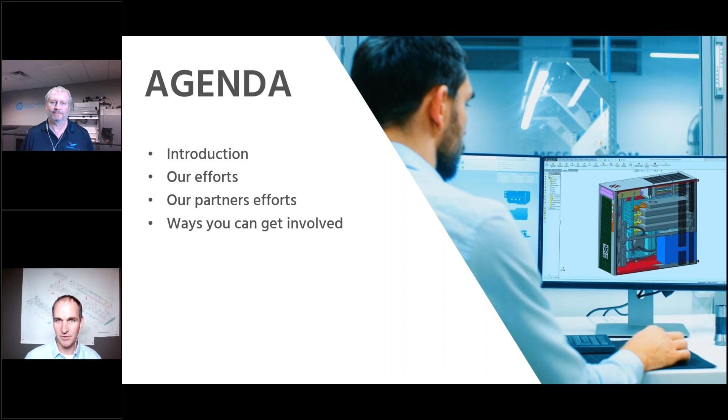A little bit about who Rob and I work for. We work for a company called Hawk Ridge Systems. We started business as a SolidWorks 3D CAD vendor. As the SolidWorks product line grew from CAD into things like simulation and file management tools with the PDM tool set, or even electrical and manufacturing tools today, it's really grown. We started taking on other complementary tools, such as the HP 3D printers or the Markforged 3D printers. We added a scanning company called Artec 3D, as well as Hexagon, which creates metrology devices like their touch probes that you see in lots of different quality groups. And then we added a few additional 3D printing tools like Materialise. It creates software that helps companies create 3D prints more efficiently, as well as post-process technologies that helps companies post-process their 3D prints faster and better than ever.

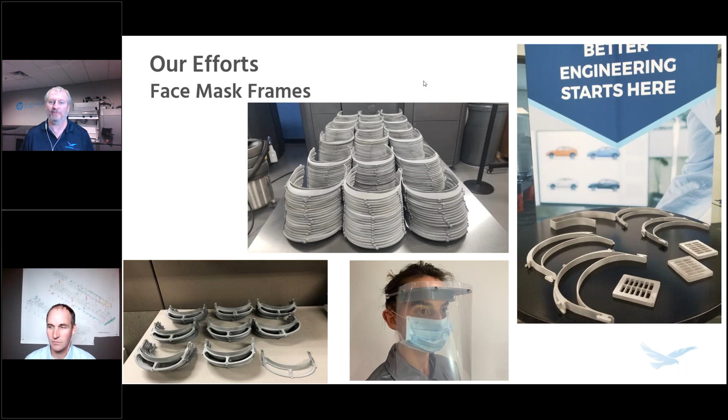So it's nice because it's regional distribution. We're not having to bring these all into a factory and pump them out. We can do this locally and get them in the hands of the people that need them very quickly. Pretty cool stuff.

Another application we've seen are these mask straps. Can you tell us what these are used for? Yeah, when you think about it, here's a very simple part, very simple application, with a lot of value to it. If you've been wearing a mask in public at the grocery store or whatever, and you hook it behind your ears, after a little while you start to get sore from that hanging on your ears. So the strap was developed to hook onto the straps of the mask. It adjusts tension, but it also takes that weight off your ears.

And we've all had times wearing sunglasses or something that doesn't take much to irritate your ears. Think of these people working on the front lines in the hospitals wearing these masks for 8-hour, 10-hour, 12-hour or longer shifts. It's a lot of wear on your ears and your body. And these we can pump out by the hundreds very quickly because it's a simple design.

You were talking to me earlier about this very design and how you were working with a customer a while back that was basically nesting them flat on the build bed, but then you showed them a way that you could actually stack them. With the HP system, it's relatively easy - it's a powdered bed system, so we can pack that entire cube, a 15 by 11 inch by 15 inch block, with all of these parts.

On the Markforged, we had a customer contact us and say, I can only get 4 of them on the print bed at a time. That's great, but I have to keep pulling parts and starting the next job - can I stack these? So we came up with the solution to stack them with a little bit of a gap, save them as a single file, and send them to the printer. It'll put support between them that you'll have to remove, but then I can put in a 5-hour build, a 15-hour build, an overnight build, and not have to be there changing them out to keep running.

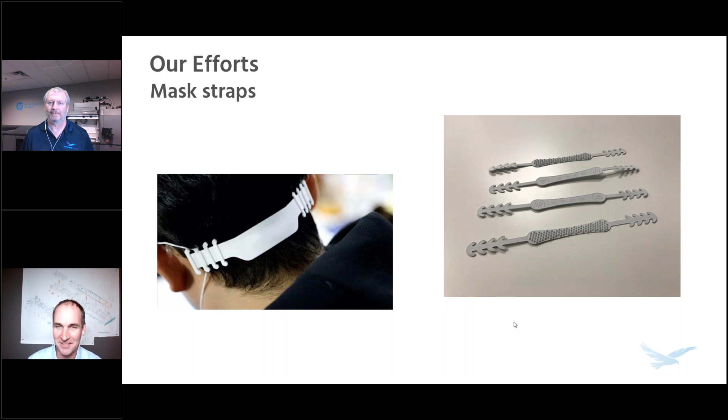And send it to the printer as one file. Pretty cool. That's the kind of stuff I think Rob's really good at, finding ways to accomplish people's needs using digital manufacturing techniques. Yeah, we've seen a lot of stuff out there.

Here's another example of efforts going on. This one's a personal effort by Scott Woods, our technical product manager out of the West Coast, based in the Seattle office. He has a friend who's a nurse who broke her mask and was told to just keep wearing it.

It's pretty tough, so he took it on himself to download some open source content and make modifications that made it print better on the technologies he's using. He's a hobbyist, but he owns like 6 of these. Maybe he's a borderline serious hobbyist - a bit obsessive, but it's good.

We see this all the time too, where local home hobbyist type stuff is able to make some strides and help people out. It's fantastic. So he printed a number of these and handed them out.

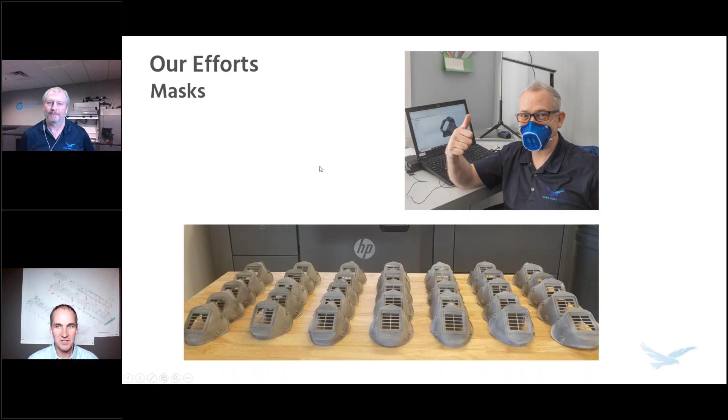Pretty neat - this is really cool, probably one of the coolest ones I've seen. This came to us through Boston Scientific here in Minneapolis. They approached us to see if we could help with this project. It's kind of cool because it's an off-the-shelf snorkel mask, something already made, and the filter on top is an off-the-shelf filter.

So what do you do? You need to hook part A to part B - you make an adapter, it's simple, just a design to make those two fit. People who saw Apollo 13, the movie - they pull out the box of parts and say, this is what we have, we need to fit this square filter onto this round hole. What are we going to do?

That's beautiful for additive manufacturing. That's exactly what they had to do here - how do we adapt an off-the-shelf snorkel mask to an off-the-shelf type filter? It's just a simple adapter, so this fits beautifully into additive. When this came to us, we did the first couple prototypes on the HP machines.

They were running their own prototypes on their additive machines in-house. We came up with a few different sizes, going back to one of the earlier discussions we've had, around how do we get this to fit. We made 5 different variations of this part and printed them all in the same build so they could check fit.

At the same time we were doing this, they built a mold. They said their mold department just knocked it out of the park, building a mold at the same time, but it needed to be validated beforehand. So we delivered 250 of these to them. I built them over a weekend. It gets them into production if they need it before that mold's put onto the line.

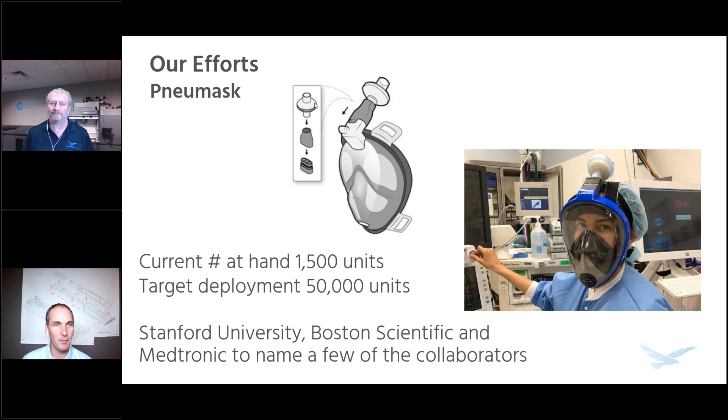We are involved in a number of other efforts, but unfortunately, due to the nature of our business, a lot of this stuff remains confidential. It's kind of a shame - some of the all-time coolest things I've gotten to do in my career I can't share with folks outside our organization, because we take confidentiality of our clients quite seriously. But know there are things we're working on that we're excited maybe in the future we can share with you.

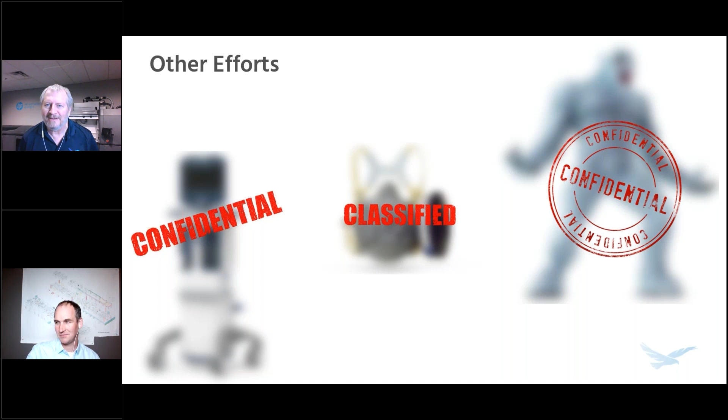Tim, is that Bigfoot on there? It sure looks like Bigfoot. Yeah, next slide. Okay, maybe we shouldn't talk about that.

Okay, got it. I wanted to pause a second and talk about why 3D printing has gotten so much exposure during this time. I know it's relatively new - well, is it new, Rob? No, it's been around for 30 years. Right, so it's catching fire. It's been catching fire for years, and sad to say, this might be one of those instances in history where this may accelerate 3D printing just because of these types of activities going on.

So while I think you and I are certainly fans of conventional manufacturing techniques, and specifically like injection molding.

I think we should be putting those in science museums and inspiring kids to go down a path of toolmaker as a career. I think it's an awesome thing. They're moving mechanical marbles that make components. If you like puzzles, mold design might be your jam.

I can design a tool that fits the end of that arm for picking parts out of a bin. I can put a part on the end of that thing that would hold it while it's being machined. It's a quick change out. The 3D printers being so quick and being able to get different iterations plays beautifully into this kind of end of arm tooling.

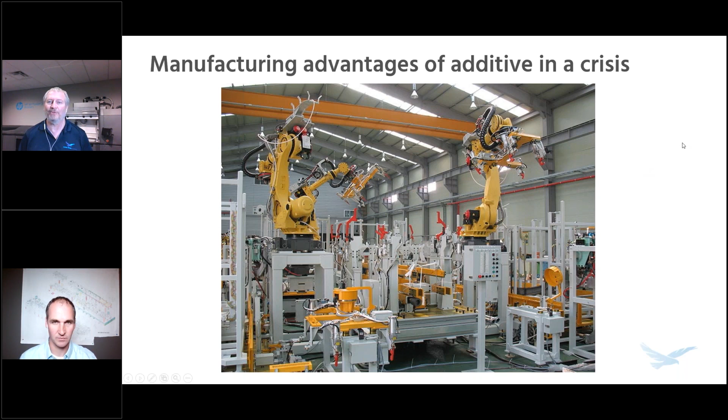And then I've also got that digital inventory, so I can send that file around the world and have them made locally and not have to have a stockpile in one place. You pretty much dovetailed right into the next point we wanted to make about the advantages of supply chain - that digital inventory, that ability to build on demand when you need it and turn it off when you don't.

And then the other part we're seeing, and we're seeing this within our own organization, is the way we can distribute this manufacturing across our different, in our case, digital manufacturing labs.

I just saw a message come through right before we started the webinar with a facility in Chicago looking for some parts. It came into our West Coast office, so they're sending that this way. Tonight I'll be building parts to send off to Chicago. It's just a beautiful piece that we don't have to be stocking these and shipping them. We can make them more local, and a lot of times right in the area they're being distributed.

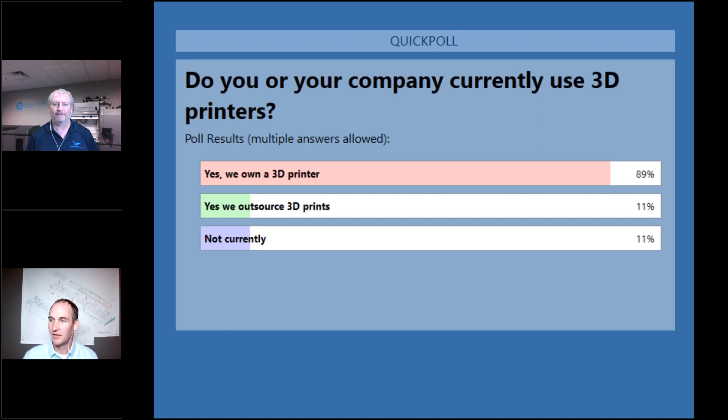I'm going to just share that with everybody in the audience here. You can see we had about 89% of you own a 3D printer, another 11% outsource some 3D print work, and only 11% aren't currently doing any 3D printing.

Beautiful. Okay, one of the things I was curious about from the audience is ways you're using 3D printing as it relates to this COVID-19 fight. If you have interesting things you're not seeing in the presentation, I'd urge you to put them in the questions area, even if it's not a question - it's not Jeopardy, you don't have to form it as a question, just pop it in there. We'd love to share that with the other folks on the line - maybe there's some interesting items you're up to.

So here's some of the items that Rob and the 3D printing team have been up to: trim guides, so this is like a cutting tool; we mentioned end of arm tooling, and we've got some pretty impressive examples of that to show you; mold tooling, whether that's vacuum forming or urethane casting or otherwise; and fixtures - boy, Rob, I've built a lot of fixtures in my career. It's amazing how many designs are just to hold some other thing during a manufacturing process.

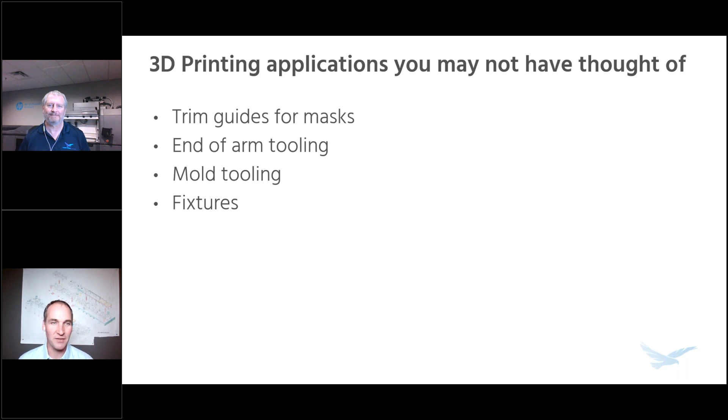And this is a really great fit for 3D printing, just the speed that we can create these, the strength in some cases, makes it a natural fit.

Replacement parts, we kind of mentioned that, but we'll show you some other examples. Adapters, and adapters for adapters, and trim seals. There's some new materials like thermoplastic urethane that can be nice and flexible and conform to the body.

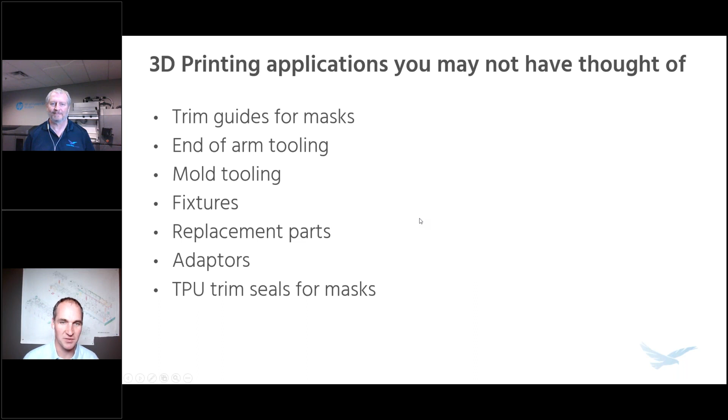So one of the things we mentioned were trim guides. And while this isn't part of the COVID-19 effort, I wanted to share it because it's an amazing little example of a cutting tool that probably would have been pretty dang expensive to create otherwise, but very easy to create with 3D printing. So I've actually got this thing right here, and it's just a piece of corrugated tubing.

But the way this trim guide works is it snaps right into the corrugation, and then there's a blade that runs in here, and then you simply just rotate this around, and it creates the cut. It's pretty clever.

Pretty neat little example. Yeah, it's one of those fantastic designs by one of our partners out there and customers, DI Labs. What's nice about that is they're actually using the piece of corrugated part as the guide for the tool to travel on.

So how ingenious is that, right? The guide piece is already there. It's a fantastic application when you're cutting and trimming. That's awesome. I've tried to cut those before, and they're a little dangerous with the utility knife.

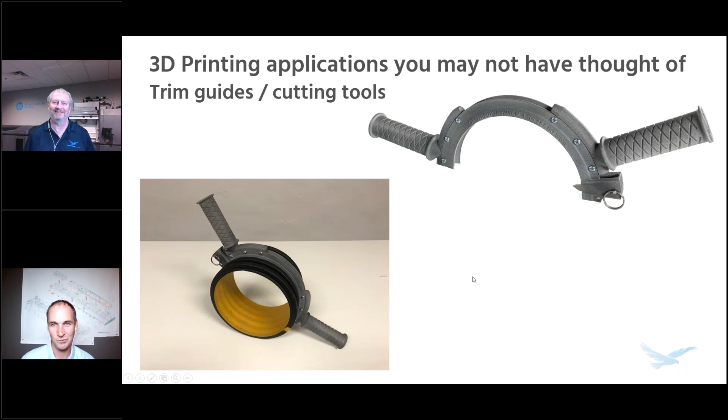End of arm tooling, insanely popular with it when it comes to 3D printing. You can print parts that conform to the part that you're picking up. Some of the fixturing can actually be done that way as well.

What's neat about this example is some of the structures actually acting as the pneumatic line. You can see the little flexible bit here at the end where we need that, but so the support structure is actually containing the pneumatics.

Here you can see other examples. These examples down here are pretty clever, Rob. I'm going to try to zoom in on those. Let's see if we can get a closer look at that.

Yeah. So the one in the bottom is really ingenious, I think. I like both of these. So I'm going to talk about the one on the left, Rob, and maybe you can share some details on the one on the right.

The one on the left there is just basically a little pinch grabber, but it was printed as a single object. So again, we've got the structure carrying the pneumatics. And then that spirally bit, as the pressure increases, it forces that to actually close. So here the entire mechanism was 3D printed.

The conventional gripper like that may be a collection of a number of different parts, so it has to be. But with 3D printing, in some cases, we can combine quite a number of parts to create this new, novel, clever design. Exactly. The one next to it, I don't know if this is the one.

I think it probably is. We saw this at the AMUG show probably about a year ago, a little over a year ago. Hey, Rob, what's an AMUG show for those that aren't familiar?

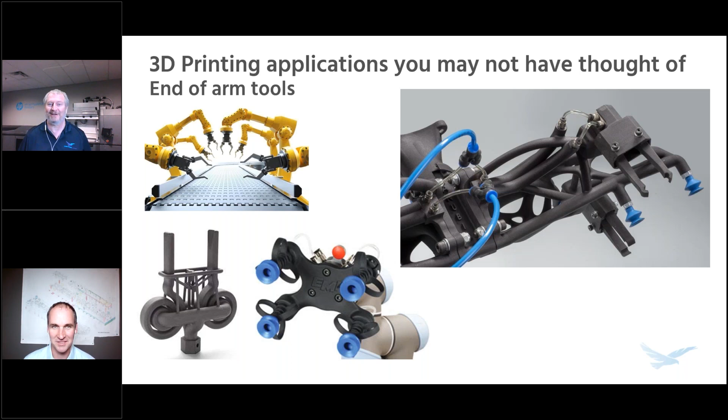You know, part of the reason I follow the industry is for these kinds of advances. Put it in the right hands, and these guys go off with their imagination, and it's like, oh my God, look at what they're doing. It's just kind of fun, right? And it's simple, somebody comes up with this great idea. I love it, it's absolutely incredible.

So here's one that's vacuum forming. We've had some success with vacuum forming. If you notice, the picture on the right is basically just an inside view of that part with the holes in it to be able to pull vacuum through it.

The main reason I'm bringing this up is when we're looking at those masks, the set of masks with the filter in the front, there's times we can print those. We can print them in quantities, we can print them fast. But if we're looking for thousands and thousands of these masks, people could most likely be thinking of injection molding or vacuum forming this. With the Metal X systems out there, we can make metal parts now for injection molding.

We can print the mold, and we're seeing that taking off right now. And vacuum forming, like this application here, I could vacuum form those masks fairly quickly, out of a material that's probably already approved by the FDA for skin contact, sterilizable, all the other things that go into approving a medical piece like that. Why not vacuum form them if you're doing quantities and it's a certain material that you need?

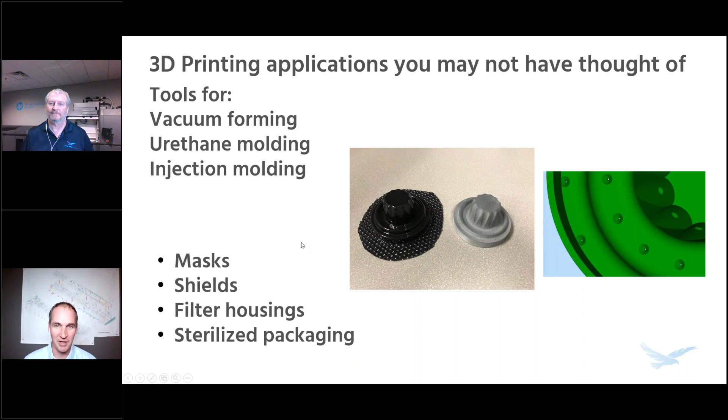Urethane molding kind of falls into the same boat, right? If we're doing custom masks for doctors, why not do that out of a urethane mold and just fit it right to their face? Pretty neat stuff, how we can build tools to support conventional manufacturing, and that has some of its own sets of advantages.

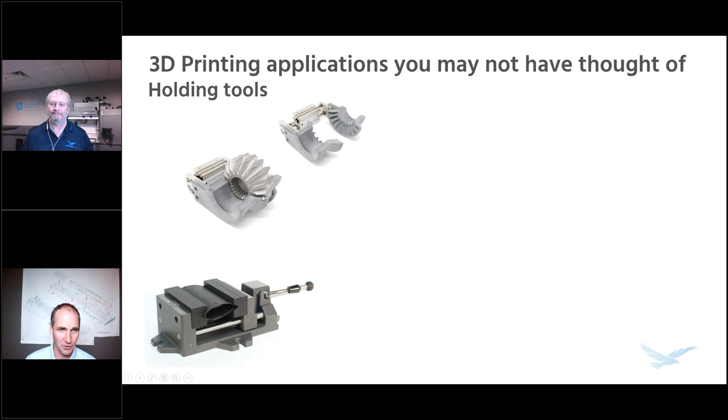So I mentioned fixturing and work holding, whether that's soft jaws that you can see down here, or fixtures that hold complex parts for secondary machining ops, a real common application. This one was pretty neat.

It's a lifting device that was made off of the Markforged. That's a nylon part with embedded continuous, probably carbon fiber, to give it a significant increase in strength. If you look at that too, we can build parts with the right geometry using plastic with carbon fiber infill. It'll get us up to the strength of aluminum.

So when we're looking at these lifting fixtures, by adding carbon fiber into the inside of them, we can make those extremely stiff and strong.

If you've ever been to one of our digital manufacturing labs, or maybe to a trade show where we or Markforged is at, you'll see this brake lever always displayed because it's such an amazing example of the additional stiffness that the carbon fiber gives you. It just doesn't do it justice without actually putting it in your hands and trying to bend it. But when you compare this to the non-reinforced part, it's so much stiffer.

Pretty amazing. And when we're looking at some of this stuff, if it's a part that has impact to it, we can put Kevlar in there instead of carbon fiber, or fiberglass. So we've got four different materials we can put inside that part, depending on what the application is that it's being used for.

Not only different materials, but different ways that we can align that fiber. This is a concentric method, but you can also do it where you've got continuous strands this way and that across the part - an isotropic laying inside of there.

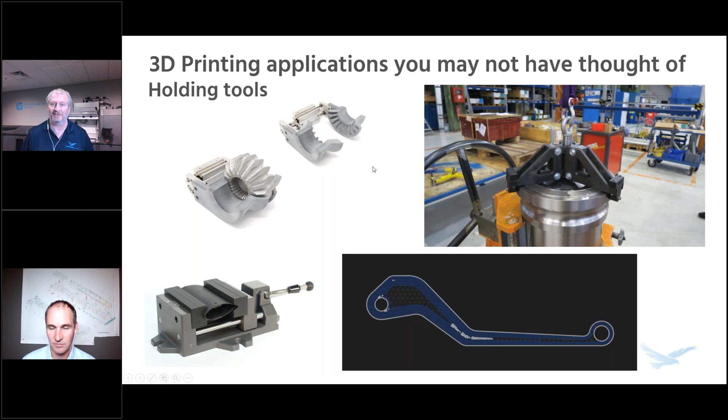This was a really cool development. Medtronic released a set of design files, actually two sets. One was specifications, but they actually released the 3D models that were developed in SolidWorks for this ventilator.

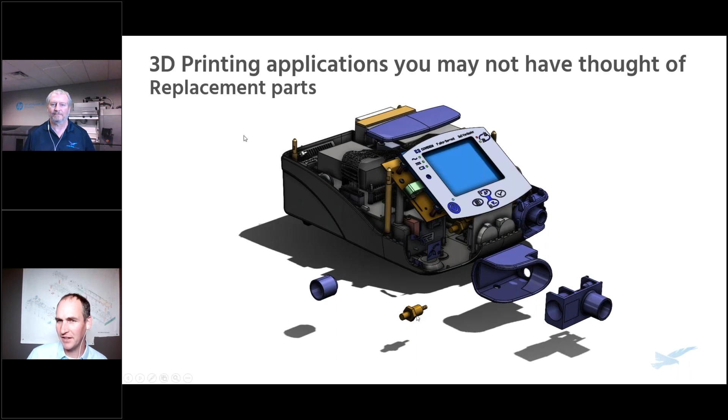So you can download this if you want to take a crack at designing things as part of your effort. Rob and I just kind of looked at this, and a lot of these things, like these hose fittings and plastic components, are things I see you printing all the time. We didn't get the time to go through this thing completely, and certainly there are parts that we wouldn't print.

But I think you'd find that we'd be able to print quite a number of the different components inside the ventilator here. And if you're looking at this, this might be a low quantity, local piece that somebody wants to build. They're not going to go and have molds made for these, most likely, because of the quantities they're in. So rather than going through all the tooling, why not just print some of these parts and get them onto the machine locally?

Pretty neat. Let's see here.

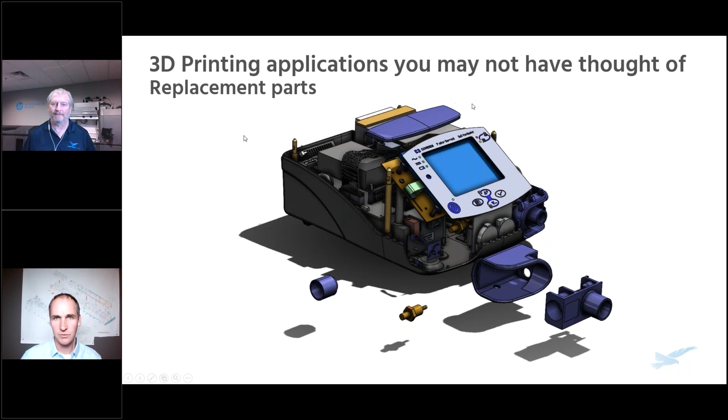In the case of HP, we're laying a fusing agent down with inkjet heads. The fusing agent in the powder absorbs extra energy from the infrared light and literally melts that layer, fusing it to the one below it. So the system is extremely fast. I can lay a little over an inch to an inch and a half of powder in an hour on that system. In balance mode; I can go faster in fast mode.

I went off and designed this fixture using the geometry of their part, doing Boolean subtractions from the part I designed. I threw that part onto our Markforged machine to print while I was printing the nozzles in the other systems in the HP system. So by the time my parts came out, all I had to do was pull my fixture off the Markforged.

I did a little study on this. It basically cut my cleaning time down to a third. Most of the time was just putting the parts onto the little fixture; the spraying time was minimal. So it's amazing how much time this saved me just by creating a fixture.

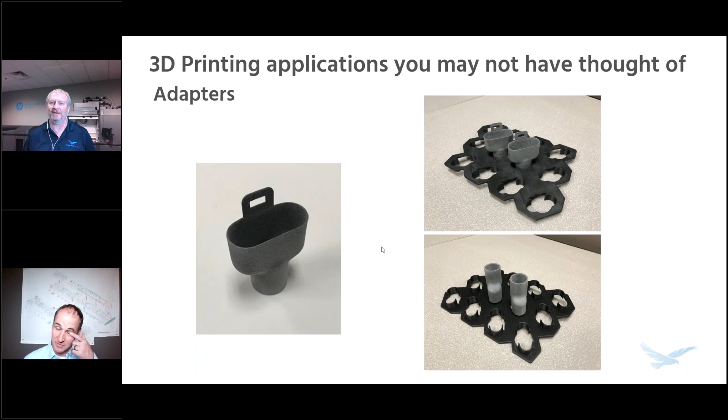That's pretty clever, pretty clever. Sometimes I get it right.

I'm finding ways to make it smarter and easier, not harder and more time consuming. I like it, I like it.

So I saw a couple of things from our partners, both HP and Markforged. Nasal swabs, custom fit masks, that kind of stuff.

The other thing that comes to mind too is when we're talking vacuum forming, we have to package this stuff. And a lot of times it may have to be packaged in a sterile environment. So we've seen applications where we make a vacuum forming tool for packaging, that they'll actually vacuum form that piece, sterilize it, put their parts in it, seal it up and ship it. So in some cases like those nasal swabs, it wouldn't be a crazy application to create a vacuum forming tool just for packaging.

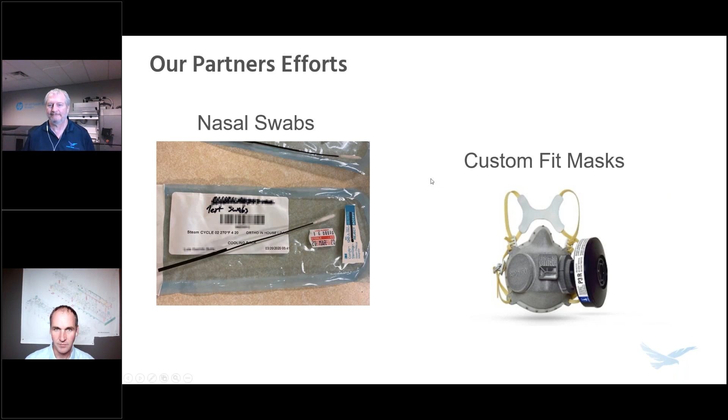It's pretty unique. There was, I think you were telling me too about it, Tim, that you saw a company in Europe that actually brought their printer in. Oh right, yeah, out of Italy. The prototypes, yeah, in Italy. So they brought their small desktop printer in and printed their prototypes to get the thing up and going so they could fit them right there at the site where the ventilators were.

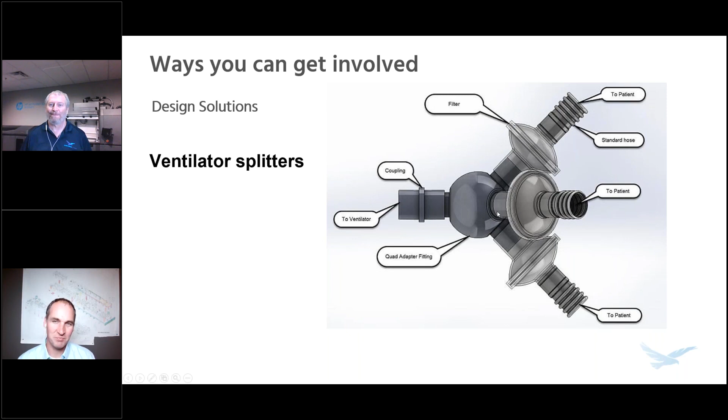I'd heard it - the guy showed up with his computer with CAD and a 3D printer and actually modeled up, printed out right there in front of everybody at the hospital. Yep, it's that efficient, really. It wasn't a splitter valve, but it was another valve. Pretty amazing, I'll bet the doctors were impressed with that.

And a real quick side note too, what we're finding is there's more and more of these medical facilities that have printing in their facilities. So it's not totally unique to them or foreign to them to be able to do this, but every now and then you'll see this stuff coming in there. But yeah, especially most of the major hospitals out there, they've got 3D printing capabilities on hand in their facilities now. So we've seen a lot of ventilator designs, whether it's the one that was released by Medtronic,

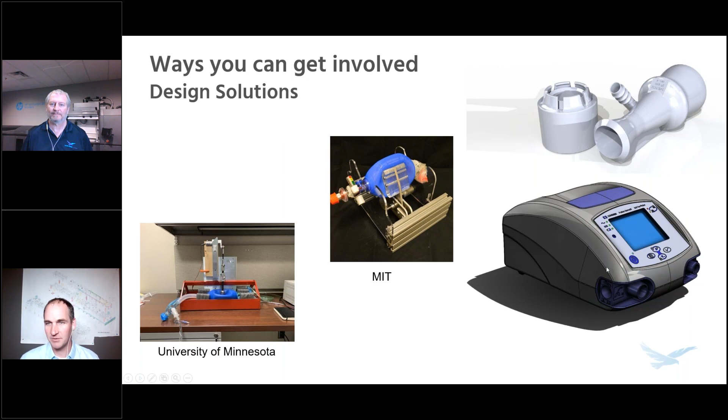So yeah, you can get involved by designing solutions, whether that's coming up with new ventilators or maybe open sourcing this Medtronic ventilator. I guess Ferrari and Lamborghini are creating this extremely fast ventilator, I would guess. Yep, so here again we go back to people that normally make cars - well, why can't they make medical equipment? It's manufacturing, it's just changing what you're doing and having the flexibility to make parts that wouldn't go on a car but would go on a ventilator. It's incredible.

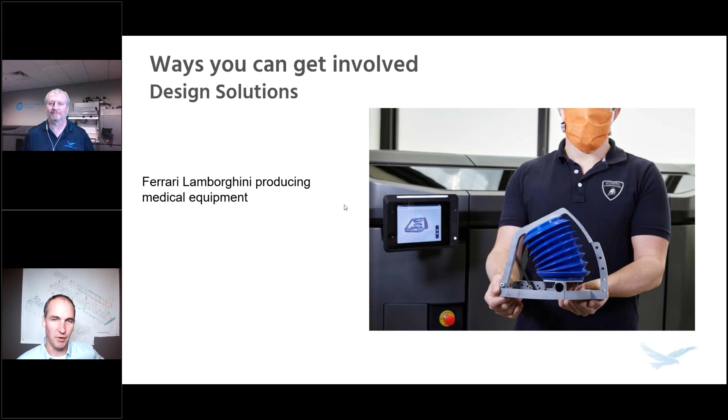All right, I think we've got some votes here. I might as well share this because the good news is 100% of the folks that voted said they absolutely would get involved. While I wouldn't consider what I'm about to show you a comprehensive list of all possible ways to get involved, there are probably unlimited ways, but here's some of the things we've seen out there.

HP has put together a link, and again, don't try to write these down. Just head right over to the Go-To Meeting Manager window, expand out the handout section, and click on the 3D printing ways to get involved PDF, and you won't have to type these links, you can just click on them. HP has an effort with a number of parts available to download and instructions on ways companies can get involved.

We see something similar from Markforged. Rob, maybe you can talk about the new mask. Yep, so that's the link to the Boston Sci Stanford snorkel mask. There's links on there to donate money, or to offer up assistance. They've got video on there of how this is being used. It's a nice website, they've done a good job putting that together. And what I like about that is it's a collaboration of a lot of companies, all in the same boat, all trying to help, and they've all come together to share resources to put things like this together.

That next link is a group of, I think mainly hobbyists, but I want to say the last time I looked, Rob, there were like 5,000 folks around the country with 3D printers who put their name on the list volunteering to print designs based on need and demand.

That's pretty cool. The next one is Scott Woods. You saw him early on with the blue mask that he printed in his home workshop. He's got instructions and models that you can download and get started and donate these. And then the last link I've provided is Medtronic, the link to their open files.

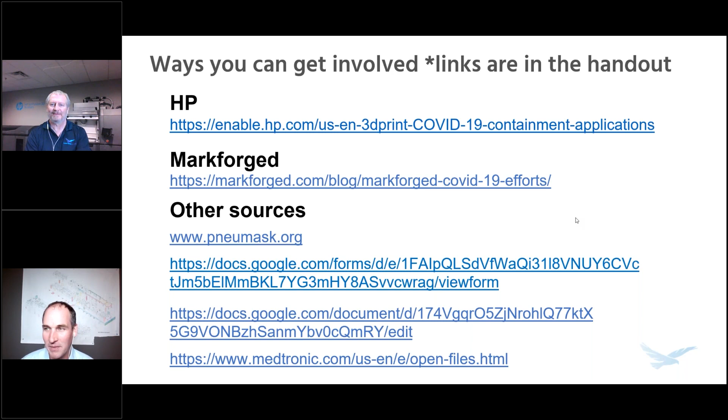So I wanted to wrap up maybe just thanking all the folks who are actually out on the front lines, doctors, nurses, first responders, folks who are out there physically helping the effort. And then also thank all of those who are contributing and building parts to help these folks in this critical time that we're in. You look at all of the help and how everybody's coming together. This is a tough time for everybody, and yet at the same time, you're seeing everybody come together and collaborating.

Oh man, totally, across organizations and cultures. Yeah, I would bet you haven't seen this in history before, especially worldwide, with people sharing and coming together. Thank you for your time today to tune in and see what's been going on out there.